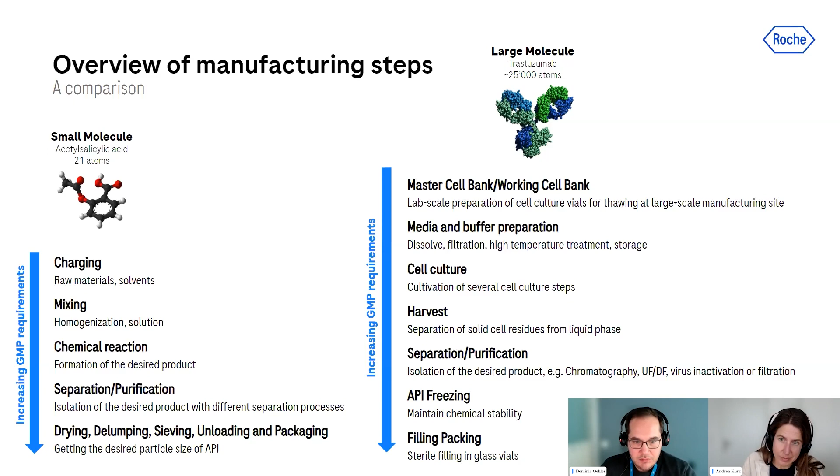As I said, both processes, small molecule and large molecule, have a difference in the nature of the product. A small molecule is a chemically synthesized molecule. On the other hand, a large molecule is a biologically synthesized molecule, and normally the product is a monoclonal antibody deriving from a genetically modified CHO cell or cell line. And then we can go on with the differences in the dosage form and the application. A small molecule is normally a non-sterile solid mostly, and the patient takes it orally. On the other hand, we have the sterile liquids for the large molecules, which are normally parenteral and given directly into the body, for example, under the skin or into a muscle, depending on the individual medicine. And the small molecule passes the digestive system of the patient, and also the body's defense works as a guard automatically.

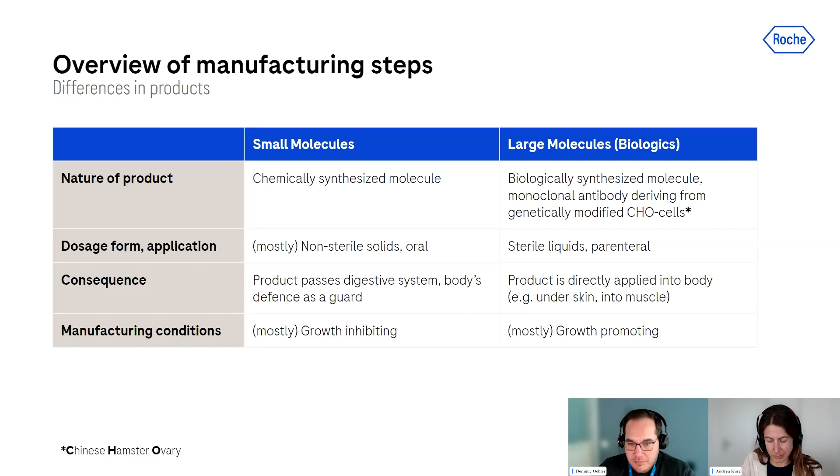Taking a look at the manufacturing conditions, in small molecules they are mostly growth inhibiting. So we don't have any promotive conditions. And on the other hand, for a large molecule, due to the manufacturing conditions, we have a high probability of contamination because of the growth promoting conditions. Next slide, please. As I said, for small molecules, the risk of contamination is relatively low, seen from the perspective of microbial or viral contamination. We have harsh conditions, they are growth inhibiting, and solvents are used for manufacturing regularly, so there is no risk of having any microbial or viral load in the drug substance or product.

On the other hand, a large molecule, where the risk is high: we have growth-promoting solutions such as cell culture medium and absolutely the right temperature for any bacterial growth. And the organism itself enables viral proliferation. And we also have retrovirus-like particles within the cell culture due to the nature of the cells.

And this is deriving in different protection objectives in the manufacturing. There's always, let's say, a primary protection objective and a secondary one. The primary one for small molecules would be the containment for employee and environment protection due to the used solvents and also the starting materials and raw materials, and maybe also the dust, which is within the area, maybe during drug product manufacturing.

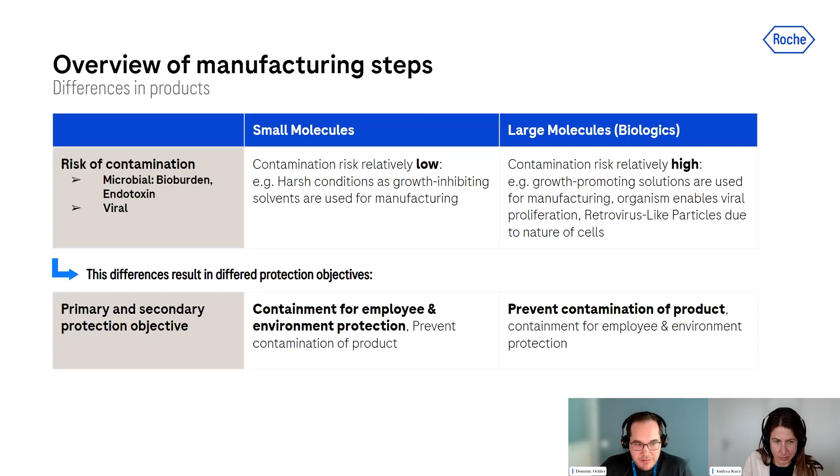And on the other hand, for the large molecule, there is the goal to prevent the contamination of the product, especially during cell culture and also more or less during the whole process. There's always the risk of having microbial or viral contamination. And of course, there's also the goal of having the containment for employee and environment protection. However, this is, based on our experience, one of the differences between small and large molecules, that the focus is a bit different. Okay, next slide.

And then I would hand over to Andrea to give you a quick insight on the regulations and guidelines. Yeah, before we go into further details on the manufacturing controls, I want to zoom out a bit and give you an overview of the international regulations and guidelines, specifically for biotech manufacturing. And as you all know, there is the ICH Q7, the Good Manufacturing Practice Guide for APIs. This includes in the scope all APIs, chemical and biotechnology, but it also includes a specific section on cell culture and fermentation-based APIs, which you can see here.

And the World Health Organization has also issued a good manufacturing practice guide for biological products, which you can see here. This is the Annex 2, TRS number 999. This guide is considered to complement the general GMP recommendations from the WHO guides, and its intent is to serve as a basis to establish national guidelines for GMPs, specifically for biological products. This guide applies to the manufacture, control, and testing of biological products for human use, from the starting materials and preparations down to the finished product. You'll see a small footnote here. This document is also published as the Annex 3 guide in the TRS report 996, but it's the same guide.

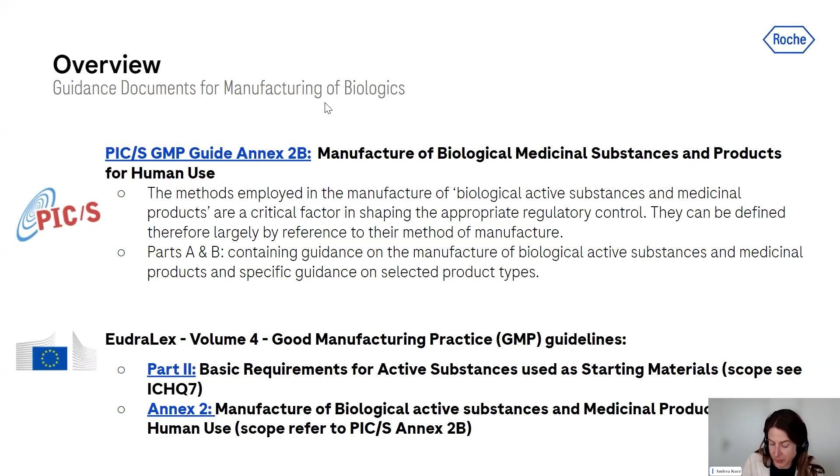Here we put some citations from the guidances. I won't read everything. The message the regulators put in these guidances, and I start with the bottom one, is that the manufacture of biological APIs involves certain specific considerations coming from the nature of the product and the process. So the way they are manufactured and controlled makes some really particular precautions necessary. Unlike conventional medicinal products, which are manufactured using chemical and physical techniques capable of a high degree of consistency, the manufacture of biological APIs and products involves biological processes and materials, for example cultivation of cells or extraction from living organisms. So the biological process may display variability, and the range and nature of byproducts may vary. You can find this citation in the PIC/S Annex 2B principle part.

And very briefly on premises and equipment before I hand over to Dominic. EudraLex states that the manufacturing and storage facilities, but also processes and environmental classifications, should be designed to prevent extraneous contamination of a product. The prevention of contamination is more appropriate than detection and removal. Although contamination is likely to become evident during processes such as fermentation and cell culture. And we've seen this before in Dominic's slide because of the nature of the process.

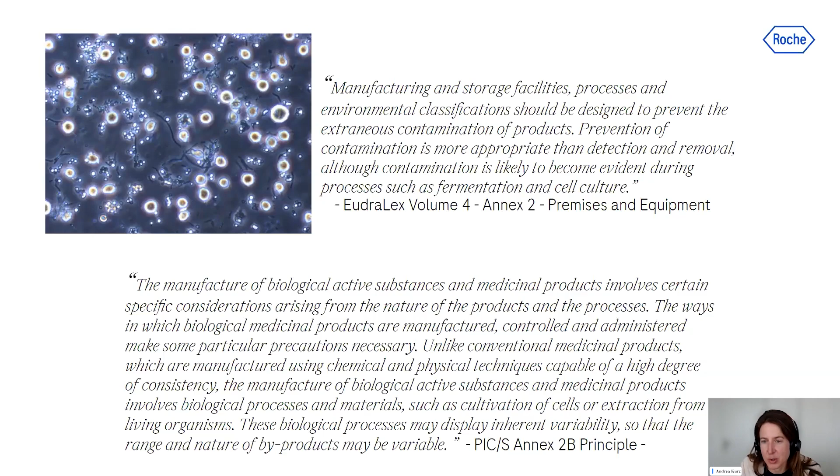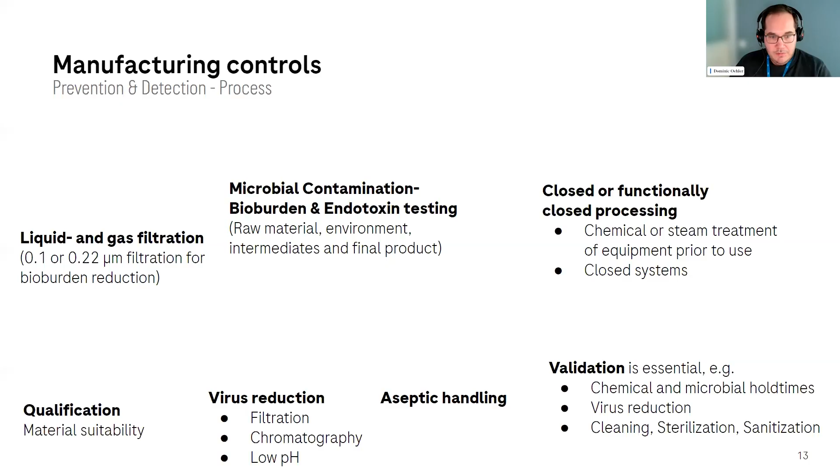And with that, I hand over to Dominic to give you further information about the manufacturing controls. Yes, thank you. And I think what we have summarized on the next slides are some manufacturing controls we apply and also the regulations

explicitly ask for. So for example, we have liquid and gas filtration during the whole process. So we have 0.1 or 0.22 micron filtration using sterilizing grade filters for bioburden reduction. Those filters have to be tested, depending on where they are used in the process, pre-use and after use for integrity, so that we can rely on the filtration process of those filters.

We also have quite a large range of microbial and contamination control. For example, bioburden and endotoxin testing. This is applied for raw material, for the environment, for product intermediates, and of course the final product and the final API.

So also very important is the design of the processes and also the equipment. Due to the high risk of contamination, the processes are or must be closed or functionally closed. And of course, if you use stainless steel equipment, the equipment needs to be chemically sanitized or receive a steam treatment prior to use. And on the other hand, you can use closed systems, for example, single-use systems.

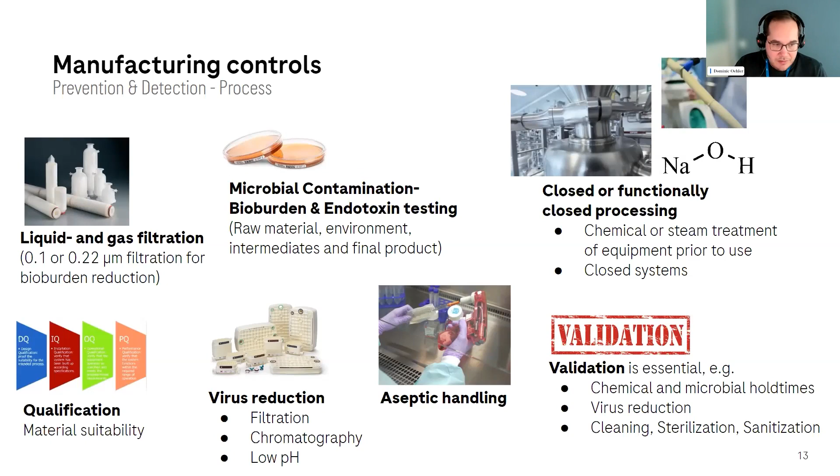Now I spoke about validation. There's also, on the other hand, the qualification of the equipment. It's a very important point here in the process, and also the, let's say, establishment of the manufacturing facility. Everything needs to be qualified. Everything needs to be suitable for biotech manufacturing, and in this respect it's really sometimes different to small molecules. We'll come back to that later. So next slide, please.

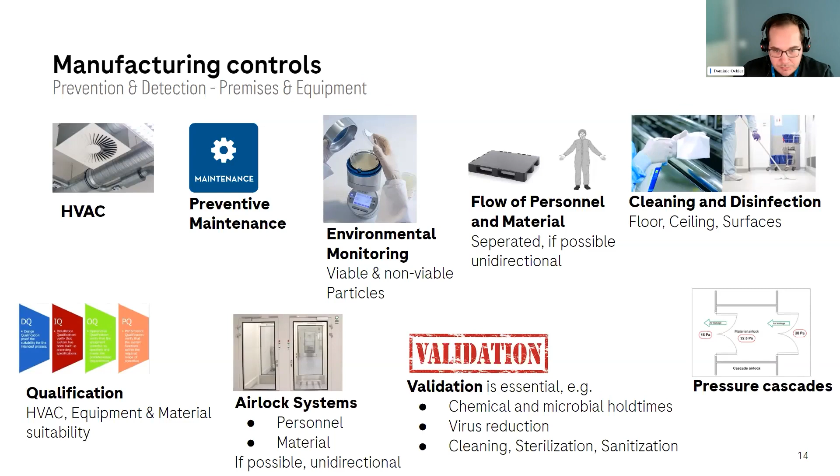And also the whole layout of the area is designed with pressure cascades to prevent, again, the contamination of the area. So in the core of the process, the most sensitive process steps, we have the highest pressure in the manufacturing area, and we are pushing the air in the direction of the non-GMP areas, to prevent any contamination in the air coming to the open process, for example. So we can go to the next slide.

So now a quick comparison on the gowning used in our drug substance manufacturing. You can see on the top the large molecule one, and I will go briefly through the instructions. There's absolutely no jewelry allowed. You have to wear safety glasses or safety goggles. No hair should be exposed to the environment. You have to wear a beard cover if required.

Of course, the hair cover needs to also cover the ears. And all snaps on the clothing need to be closed. The shirt needs to be tucked into the trousers, and all the skin must be covered at the ankles. And of course, you are wearing clean room shoes. So there's really a high effort every time you want to enter a clean room area.

So this ISO 9 area is the, let's say, less controlled area, coming to the ISO 8 area, where we have, for example, downstream or open filter installation. It's based on what we see for ISO 9 plus an additional overall, which is put on in an additional personal airlock to further increase the safety level for contamination prevention.

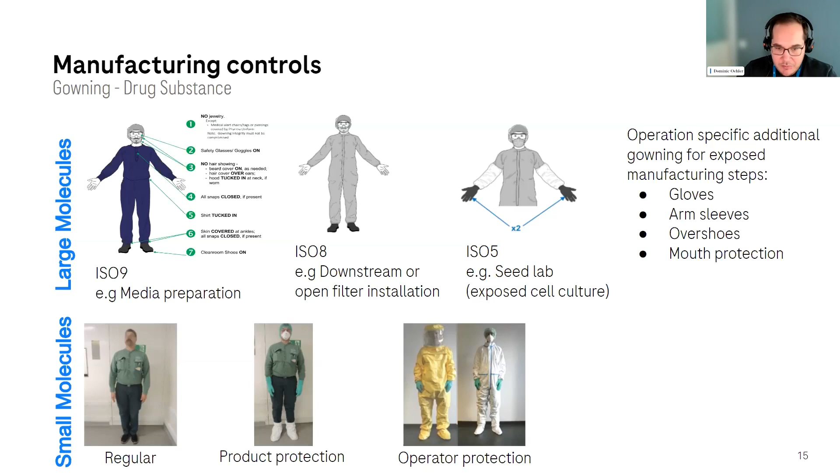So go to the next slide. And this is also a bit the additional point. As I said, it's a biotech manufacturing, and it requires fundamental biotech knowledge and also comprehensive understanding of microbiology for contamination control. As you saw, the goal of protection is different, and it's really important to have the appropriate knowledge for that, and also the understanding where the risks are deriving from and what to take a close look at.

Due to that, we have an intensive onboarding and training of employees. So our operators, or for example internal or external craftsmen, need to also take a close look at hygiene, personal health, and gowning. It is important that they are aware of the risks deriving from that.

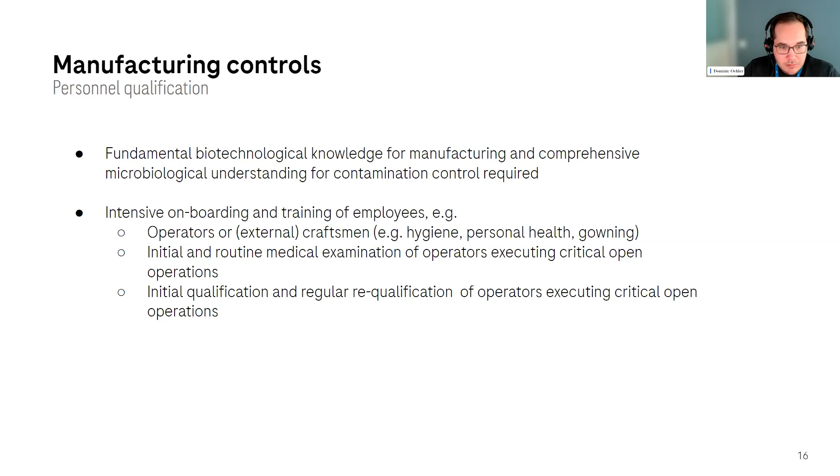Please, dear speakers, can you conclude the presentation? We must respect the time, please.

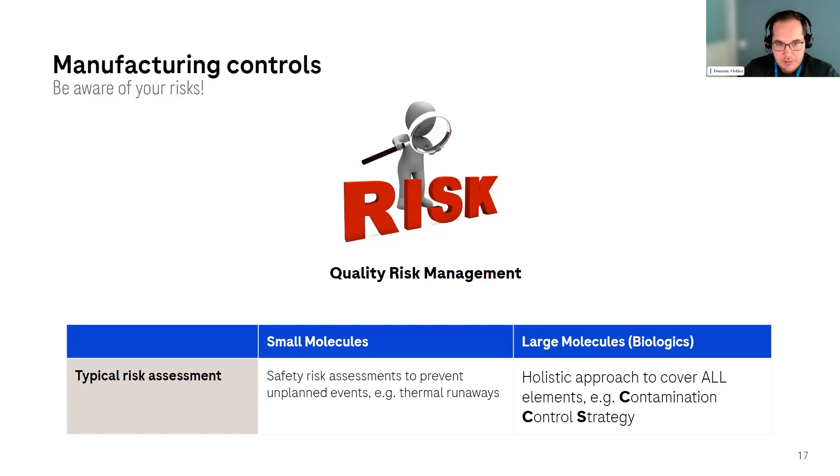Also very important is the risk management. Again, it's a different perspective. On the one hand, it's to prevent thermal runaways. On the other hand, microbial or viral contamination. Go to the next slides. Now we have some pictures of premises in biotech manufacturing. You can see the clean room areas and also the equipment used.

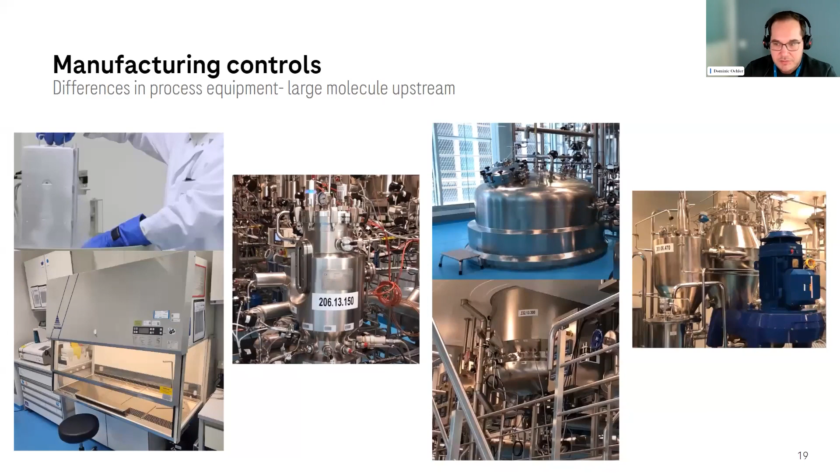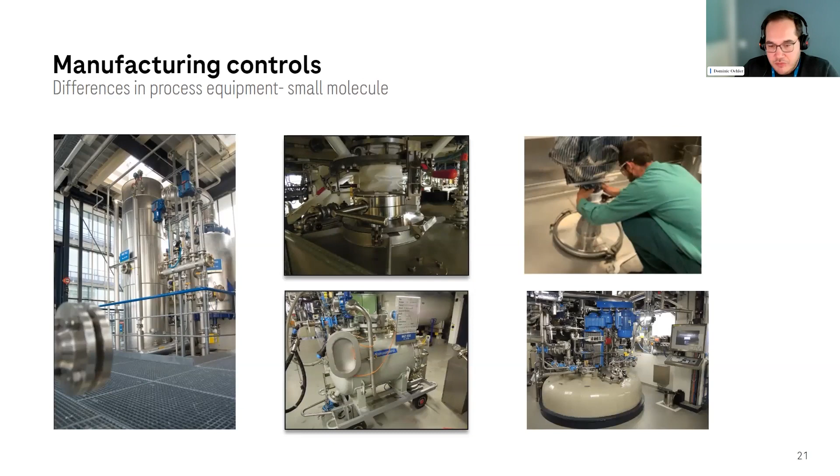We also have differences in the materials of construction, again coming from the nature of the product and the manufacturing processes themselves. Normally, in small molecule manufacturing the piping location is not really important. But in biotech manufacturing, you want to reduce the amount of surfaces in the manufacturing area as much as possible to prevent contamination.

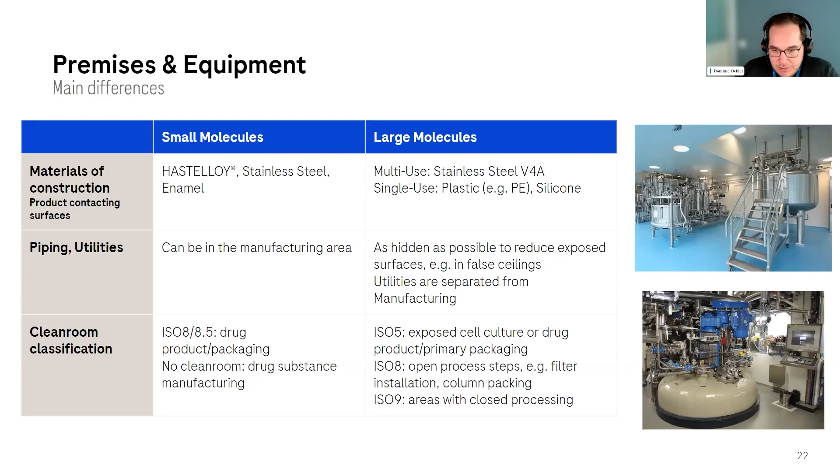And also the clean room classes used. We have ISO 8 or ISO 8.5 in drug product or packaging, and no clean rooms for small molecule drug substance manufacturing. And as I told you, in large molecule, we apply ISO 5, ISO 8, and ISO 9 for manufacturing with all the requirements described in the regulations.